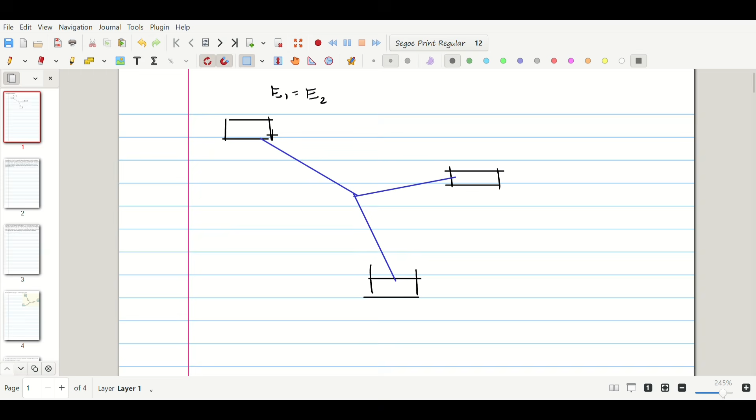It might differ only when there's head loss. But we know that head loss is simply subtracted. So instead of staying the same when there's no head loss, what we do is subtract the head loss from the energy at point 1 before we arrive at point 2.

Or at the energy of our second point. And also, the discharge is still constant all throughout our pipe. So apart from those governing laws, there's one important thing we need to know, and that's the energy at our junction.

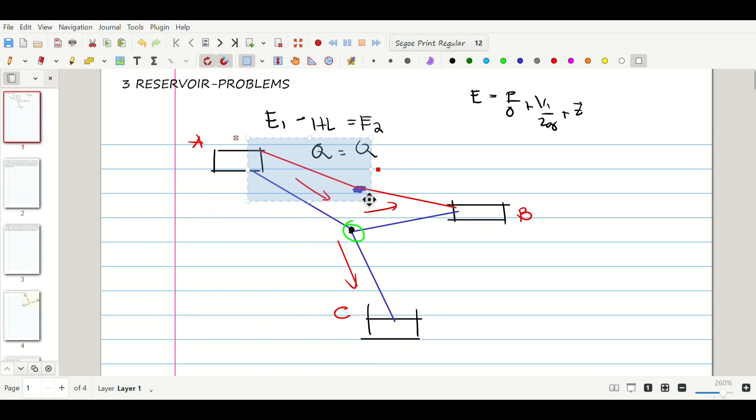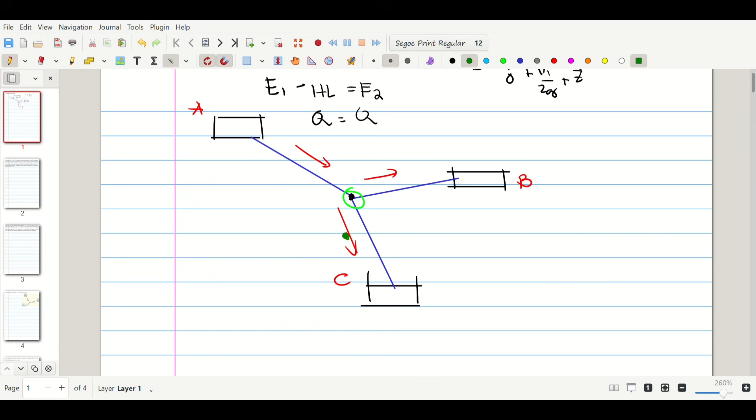So paano naman kung nasa ilalim, kung nasa baba siya. Kung ang ating junction ay nandito sa ilalim, nandyan sa point na to. So alam na natin, ibig sabihin yung energy grade line natin is below kay B and below kay A, yung energy grade line ng junction. Ibig sabihin, the fluid will flow from A to junction and from B to junction, bago sila pupunta kay C. Kung nakalimutan mo, paano natin malalaman yung flow ng fluid? Dahil sa energy, kung nasaan mas mataas yung energy, hindi kasama yung head loss, yung energy in terms of pressure, velocity, at yung ating elevation.

Kaya sila nagiging equal dahil sa head loss. Based on their energy, doon natin malalaman kung paano yung flow ng fluid. Si junction yung magsasabi nun. Kung si junction, yung energy niya ay mas mataas kay B, ulitin natin, mas mataas kay B, ibig sabihin from the junction ang flow natin papunta kay B. At dahil si junction, tawagin natin itong elevation or energy elevation as J, mas mababa naman sa energy ni reservoir, pag ganun naman yung flow. So simply, yung energy ni junction o energy grade line, energy head ng ating junction will tell us kung paano yung magiging flow ng ating liquid.

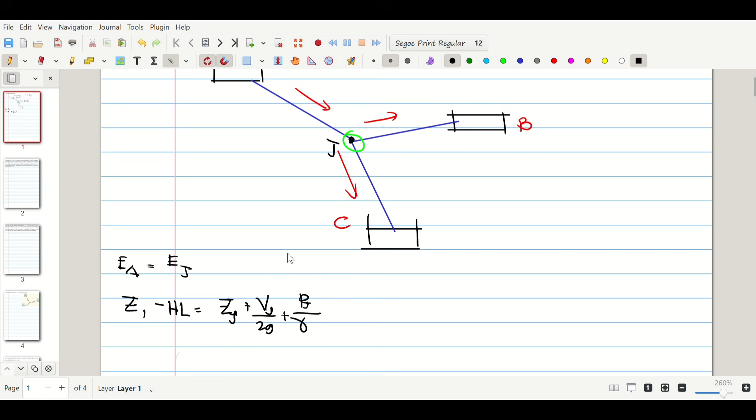So para maging equal yung energy sa reservoir and sa junction, kailangan nating bawasan ng head loss. Let's call this head loss from A to J, yung head loss nitong pipe na to, yung nasa gitna nila. Equal yan sa energy sa point J sa junction, which will consist of the elevation ng junction, elevation head ni junction, velocity head ni junction, and then yung pressure head sa junction. Now, from this equation, most of the time, hindi na natin binibigay dyan yung elevation ni junction o yung pressure head ni junction. At most of the time, hindi na rin yan necessary pang alamin. Depende sa problem, itong mga value na to, hindi na necessary. Bakit? Ano bang kailangan natin? Yung value lang ng energy head sa junction. Wala tayong pakialam kung ano yung pressure dyan, ano yung velocity dyan, ano yung elevation head dyan, kasi ang gusto mo lang malaman is kung ano yung energy sa junction.

So meaning, di ba, kita mo na nangyari? Elevation ng ating first reservoir minus yung head loss, equal na yan sa energy ng ating junction. Okay, equal na. So meaning, let's say nandito yung energy head ng ating junction, yan, this is the energy head. Let's call this J prime ng ating junction. Yung difference in height, in elevation, or in energy from reservoir A and dun sa mismong junction, yun na yung head loss ng ating unang pipe. So kadalasan ang tawag dyan, head loss 1 or head loss dun sa pipe 1.

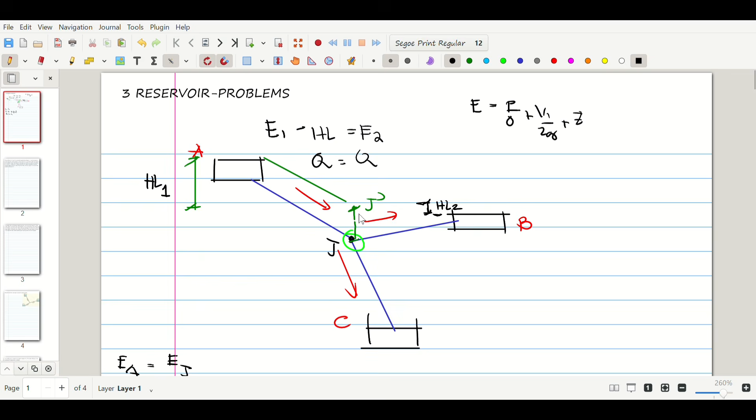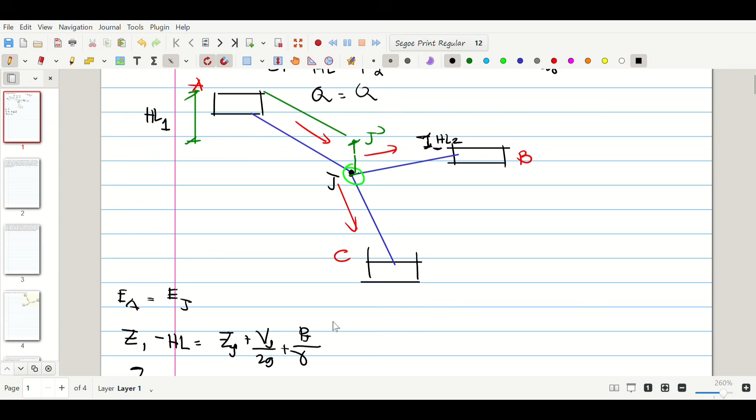Now, one thing to note here about our junction is that there are times when the elevation of the junction is given, and also the pressure is given. So with that, you can already get the energy at the junction. But you might ask, sir, there's still velocity. You may encounter cases where the pressure is given and the elevation head is given, and that becomes the energy.

So what happened to the velocity? What we do here, although it's not really zero, is the velocity is also neglected at the junction. The reason is to simplify our analysis, because if we also consider the velocity at the junction, you will find yourself solving a very complex problem. So in actuality, it's not zero, the velocity at the junction.

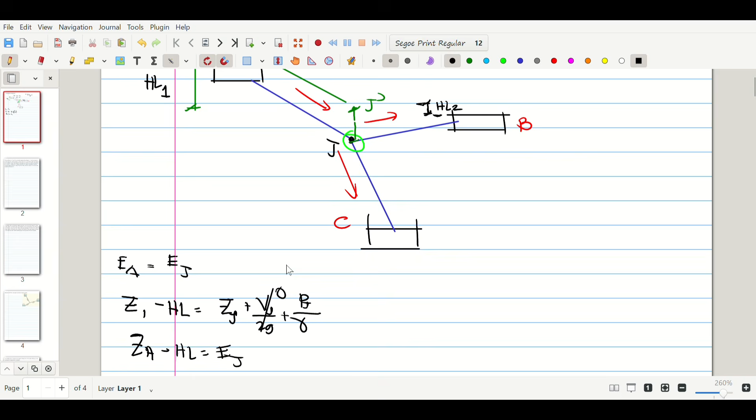Because that's where all the pipes connect, it's not zero. But if we consider it, the solving becomes overly complex. And in real life, neglecting the velocity at the junction is not critical, because compared to the head loss caused by our pipes, it's very small or minimal relatively. So since we're doing approximate analysis, this velocity is not considered. If you ever encounter why the velocity at the junction is suddenly disregarded when getting the energy, the purpose is to simplify the analysis.

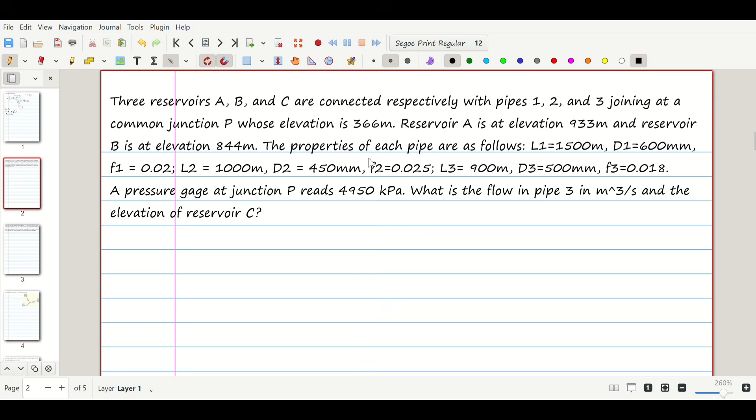So with that, let's solve a problem now. Here we'll see how this works, how it's solved. We have this first problem: we have these three reservoirs, A, B, and C, connected respectively with pipes 1, 2, and 3 at a common junction, with the elevation given.

Reservoir A is at elevation 933 meters and reservoir B is at elevation 844 meters. The properties of each pipe are given. So L sub 1 is the length for pipe 1, D sub 1 is the diameter of the first pipe, and F sub 1 is the friction factor of our first pipe.

Knowing that when the given coefficient is F or friction factor, the formula for head loss that you should use has to be the Darcy-Weisbach formula. Continuing, we also have the length, diameter, and friction factor for the other two pipes, pipe 2 and pipe 3. Also given is the pressure at junction P, which is 4,950 kPa.

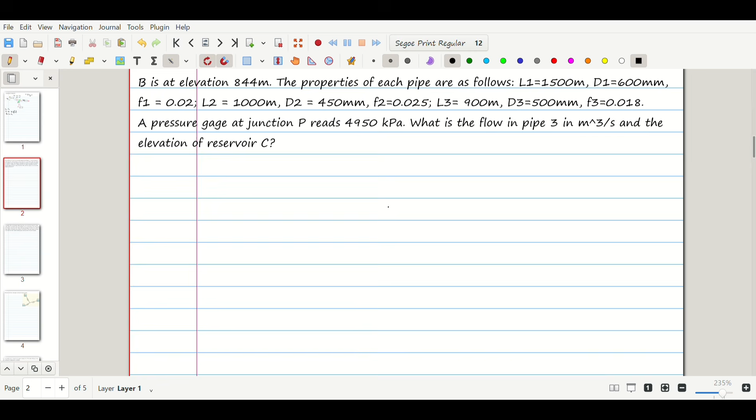So let's write the first reservoir, reservoir A. Its elevation is 933. So that's given, 933. Also, reservoir B is at elevation 844, so somehow it's a bit lower. The elevation is 844.

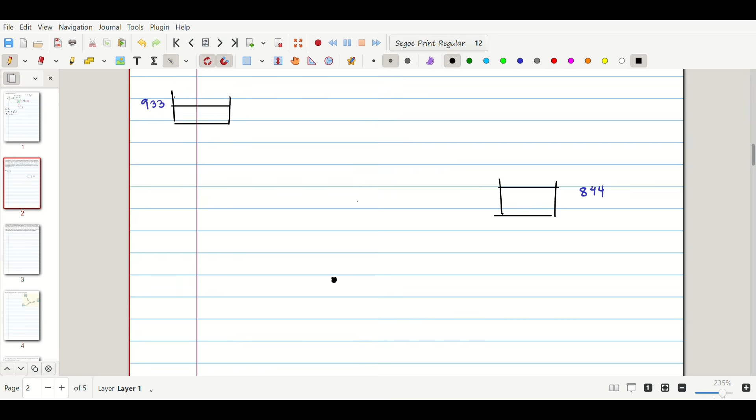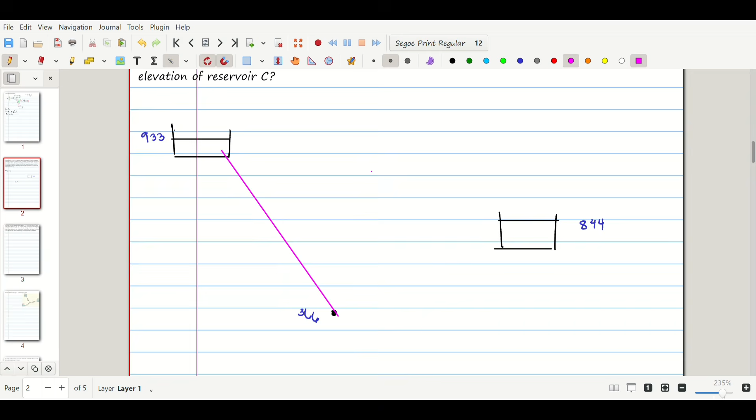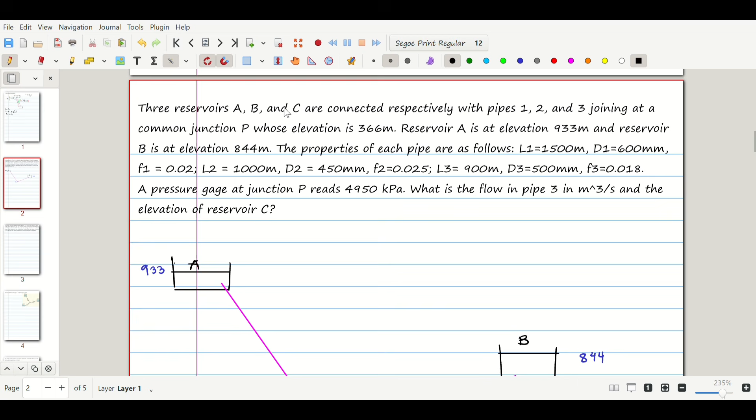So let's place a pipe from reservoir A going to the junction, and then from reservoir B going to the junction. Let's label them: reservoir A, reservoir B.

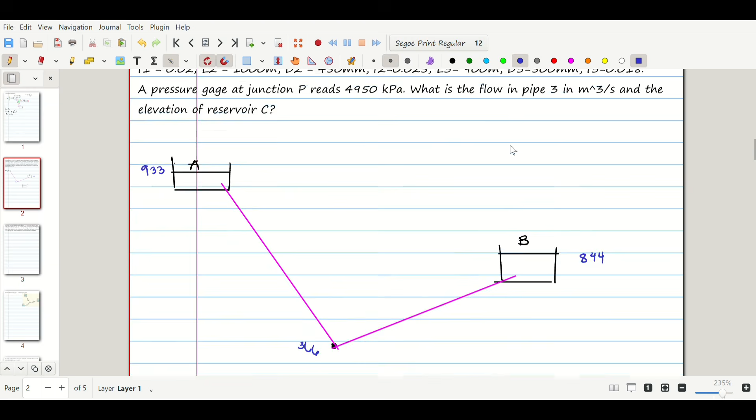And meron pang panghuli which is yung ating pipe number 3 connected to the third or the last reservoir, reservoir C. So lagay natin dyan. Okay? Hindi natin alam ang elevation ng reservoir C kasi yun ang pinapahanap, and yung discharge sa panghuling pipe natin, yung pipe mula sa junction papuntang reservoir C. Okay, so ito na yung initial setup ng ating 3 reservoir.

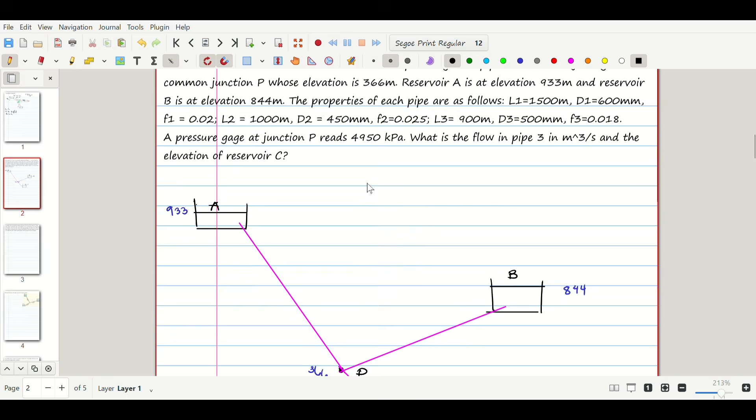Pero ilagay din muna natin na yung pressure sa junction P, okay, let's call this junction P, is 4,950. So may pressure, okay? Ibig sabihin, ang energy at junction P is equal to the pressure head plus the elevation head plus the velocity head. Pero nabanggit ko na kanina, diba?

Ito yung purpose nun, this velocity, sinisiro na natin yan to simplify the analysis. Hindi naman po yan critical because ang pinagko-compare natin nitong velocity head is yung head loss due to the pipes natin, yung mga major head losses natin. And most of the time, this velocity head is maliit lang with respect doon sa major head losses natin, so okay lang na i-zero siya. Okay, pero in actual, hindi talaga zero, we just have no choice but to do this, kasi carry naman sa analysis na hindi siya super magiging malaking error. Complicated po kasi kapag kinonsider pa siya, so meaning, itong dalawa na lang.

So the elevation or the energy head sa point P is the pressure 4,950 over the unit weight, which is 9.81, plus the elevation 366. So from here, makikita na natin kung nasaan yung energy ng ating junction. So this is at 870.5872. From here, you will see this value is lower than the elevation or energy ng ating reservoir A.

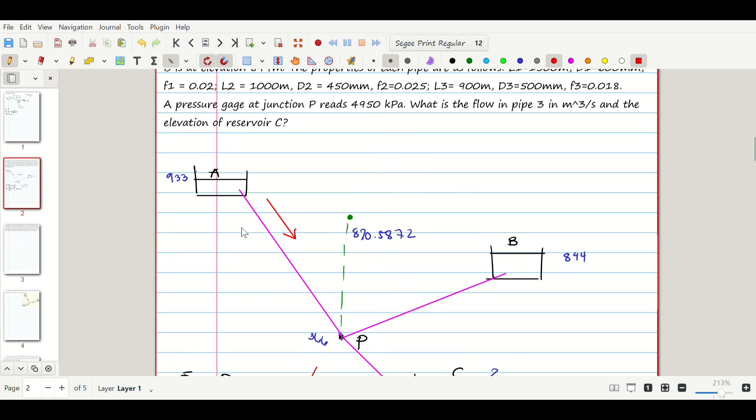So i-check mo na, alam na natin na yung flow ng liquid is from reservoir A, pupunta siya ng junction. The reason? Yung energy, mas mataas ang energy ni A kumpara sa energy ng ating junction. So ganun talaga yung flow. And ito one thing to note, this elevation of the junction has to be lower than the elevation of our highest reservoir. And this junction or the energy head of this junction has to be higher naman doon sa lowest energy or elevation ng ating huling o pinakamababang reservoir.

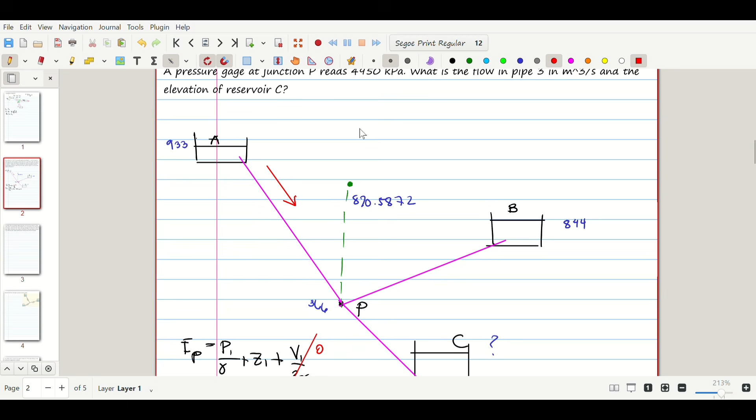So dapat nandito lang siya sa gitna. Bawal siyang lumampas sa elevation ni A, bawal naman siyang bumaba sa elevation ni C. Kasi obvious naman ang reason, diba? Hindi naman pwedeng mas mataas siya kay A kasi sino na magsusupply ng tubig? Diba? Langit? Diba? Hindi naman ganun. So hindi na pwedeng sa ilalim, kasi saan naman nila itatapon yung tubig? So nandito lang.

Now, with this, the flow of the liquid or the water is from A, papuntang junction, and from the junction, obviously, mas mataas na siya kay B, and the same should be true para kay C. Okay? So the elevation ng ating junction or the flow of the water from the junction should be like this.

So kung susumahin, if this is the first pipe or pipe 1, ito naman yung second pipe or pipe 2, and ang huli is the pipe 3. We can say na yung discharge doon sa ating unang pipe has to be equal sa discharge doon sa pipe 2 plus sa pipe 3. Tama? Diba? So mahahati kasi yun. Okay, so parang ito na yung unang equation mo, ito na yung continuity equation in application.

So ina-apply natin siya dito sa 3 reservoir problems. Now, with this, need pa natin ng additional equation. Bakit? Kasi hindi naman natin masasolve yung discharge sa pipe 3 nang ito lang yung alam natin. So we need another data, okay? Dito na papasok yung mga head losses.

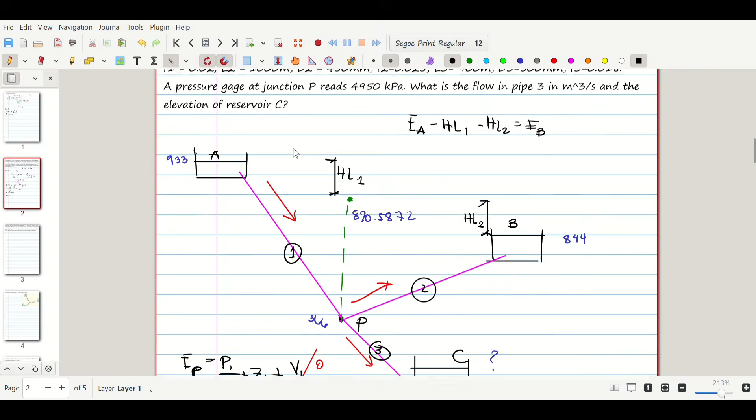So, meaning, the difference in elevation from junction A, elevation Z, from junction A, reservoir A to the junction, that's our head loss 1. The elevation of A minus the elevation of the energy grade line of our junction, that's head loss 1. For head loss 2, that's the energy grade line of our junction minus the elevation of our reservoir. So if you reference it to 0, notice that when we subtract 870 and 844, that's head loss 2.

The difference in energy from junction to reservoir B, that's head loss 2. Let's replace this with J and E. So from these equations, you can see that we can solve for our head losses. Let's solve it since we can.

So the difference in energy from A to J is 933 minus 870.5872. This is equal to 933 minus 870.5872, so this one is 62.4128.

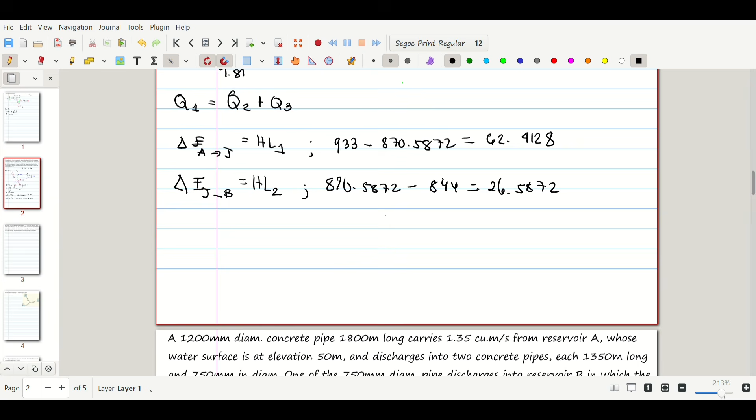So that's our head loss 1. Let's go to head loss 2 since we can get that too. For head loss 2, that is 870.5872 minus 844, so 870.5872 minus 844, this gives us 26.5872. So with these head losses known to us, we now know head loss 1 and head loss 2, or the head loss in pipe 1 and the head loss in pipe 2.

Actually, there's another data we can solve for, and that's Q, the discharge. Let's recall the formula for head loss: Head loss equals 0.0826 times F, L, Q squared, over D raised to 5, using the Darcy-Weisbach equation.

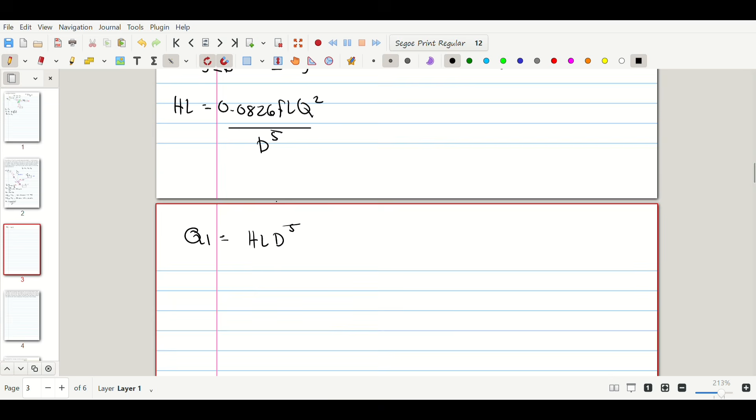So for pipe 1, given its length, diameter, and friction factor, we can solve for Q sub 1, or the discharge in our first pipe. So Q sub 1 equals the square root of HL times D raised to 5, over 0.0826 FL. So what did we do? We moved D there, then divided by 0.0826 FL.

At this point, let's substitute the known variables. The head loss for pipe 1 is known, which is 62.4128. The diameter of the first pipe is 600mm, or 0.6 raised to 5 in meters. Then 0.0826, the friction factor is 0.02, and the length is 1,000. So here we get Q sub 1 equals the square root of 62.4128 times 0.6 raised to 5, over 0.0826 times 0.02 times 1,000.

So this is equal... wait, is it 1,000? No, 1,500. So this gives us 1.3995 cubic meters per second.

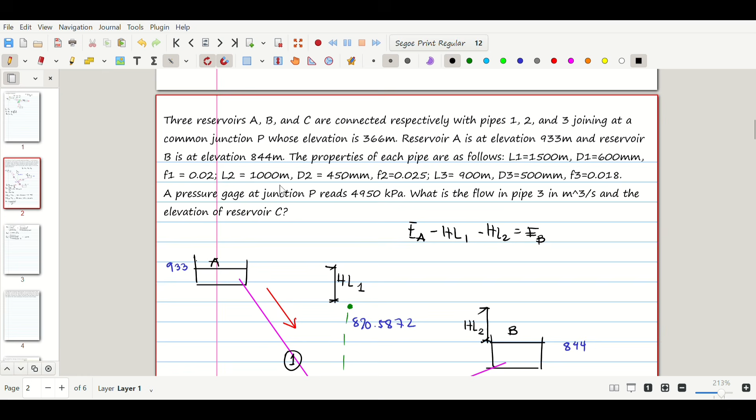So this is equal to... wait, we might be looking at this wrong. 450, 0.025, 26.5872, 0.0826, 870, and 0.45 raised to 5, 0.0826 times 0.025. Actually, the 900 is wrong, it should be 1,000. I knew it. That's confusing. It's 1,000. L sub 3 is the one that's 900, so this should be 1,000. So this is wrong, let's change it.

So this one should be equal to 0.4874 cubic meters per second.

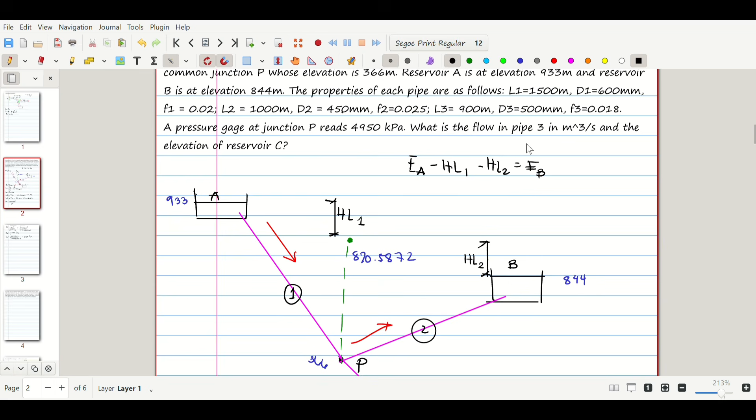From this, we can get the discharge for the final pipe, since we know the discharge in pipe 1 equals the discharge in pipe 2 and pipe 3 combined. So what's being asked finally is the elevation of reservoir C and the discharge in pipe 3. Let's get the discharge first since it's easy. Discharge in pipe 3 equals discharge in pipe 1 minus discharge in pipe 2, Q1 minus Q2. This gives us a value of 0.912 cubic meters per second, and that's our final answer for that.

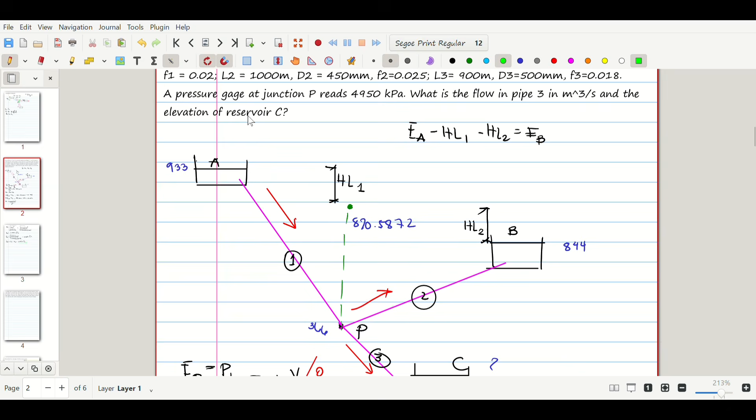Next, what is the elevation of reservoir C? To get the elevation of reservoir C, we know that the difference in elevation or energy from the surface of the reservoir to our energy grade line is the head loss in pipe 3. Same concept: from the junction to reservoir B, the difference in height is the head loss. So it's the same for C. The elevation of the energy head of our junction minus head loss 3 gives us the elevation of reservoir C. So with this, we get the elevation of reservoir C, which is 870.5872.

5872 minus natin yung head loss 3. So ano ba yung head loss 3? Okay, so using the formula...

0.0826 F. May F na tayo, diba? What is the F? For the last pipe, 0.018. So 0.018. How about the length? 900. Q, 0.912 squared over the diameter, which is also given, 500. 0.5 raised to 5.

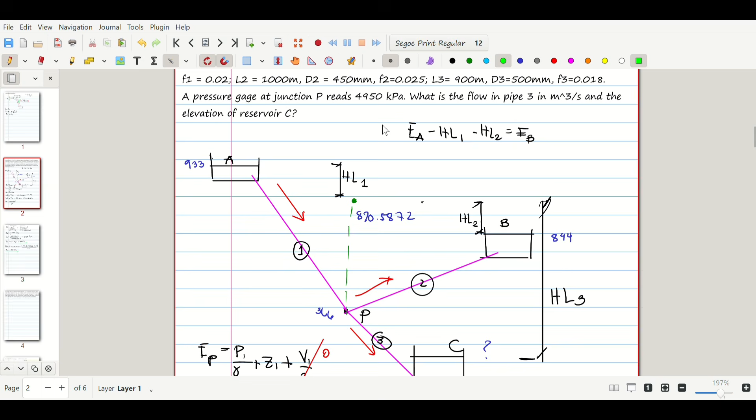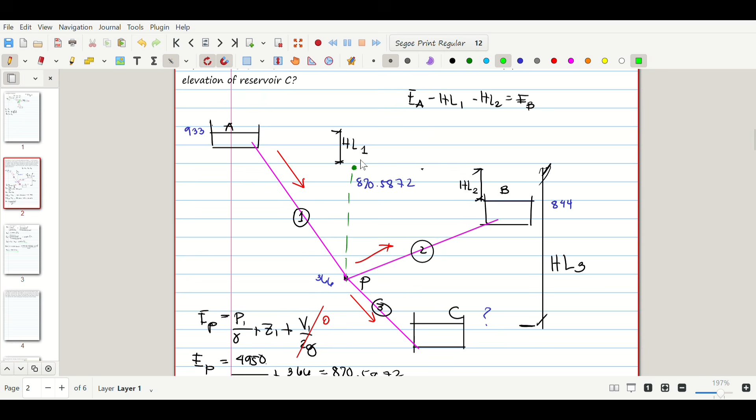Pero pag hindi siya kayang hanapin, doon na papasok yung another way wherein ang gagawin mo naman is to assume. I-assume mo na yung ating energy grade line ng ating junction is mas mataas dun sa ating pangalawang reservoir, and then doon mo i-route lahat ng iyong solution. Okay, so may mabubuo kang mga equations dyan. Diba? So dito sa case natin, anong nabuo mo? Yung ating discharge sa pipe 1 is equal to the discharge sa pipe 2 plus pipe 3.

Pero kung iba naman yung assumption or mali ka ng assumption, kasi anong nangyari, inassume mo na nandoon yung elevation. Pero hindi kasi possible or hindi naman laging 100% tama tayo ng assume unless alam mo na yung sagot. So kung hindi natin alam ang sagot, may tendency na magkakamali tayo ng assume. So ano ang mangyayari kapag mali ka ng assume? Hindi mo masasolve. Okay, ganun na lang kasimple. Hindi siya masasolve. And that is related dun sa ating shift solve.

So which will be matatalakay yata sa kasunod na problem. Okay, so but for this one, kapag alam mo na yung elevation ni junction, gawan mo na ng equation yung ating discharge, gawan mo ng equation yung ating head loss, and tulad ng ginagawa natin sa pipes in series and parallel, hahanapan mo ng relationship yun.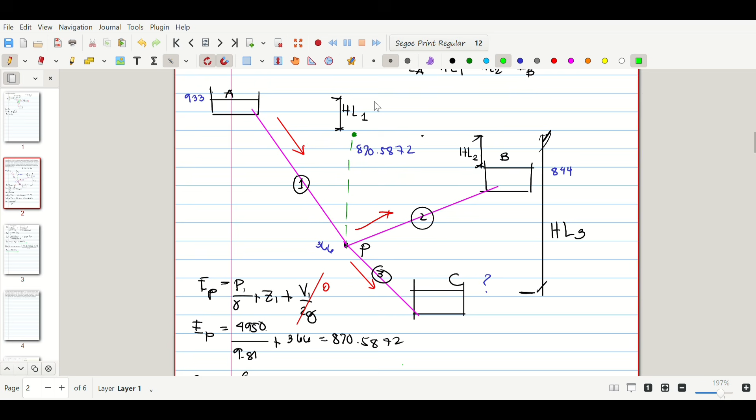Okay, so primarily, anong ginawa natin? Yung mga elevation, diba? So tatandaan mo na yung difference in energy between the reservoir and the junction is simply the head loss ng pipe na dinaanan mo mula sa reservoir papuntang junction. Okay, ganon. And with that, dire-diretso yun.

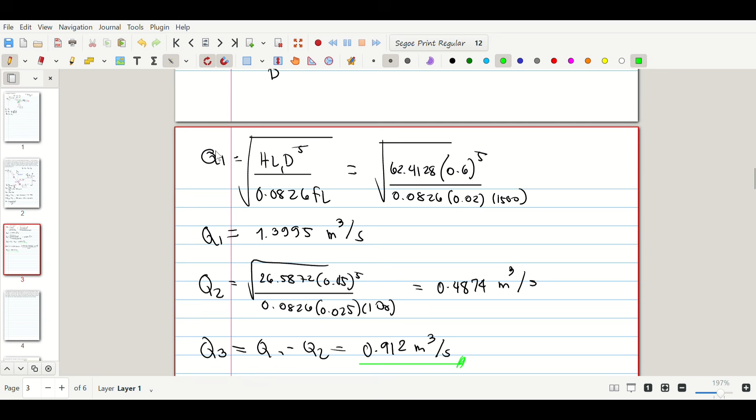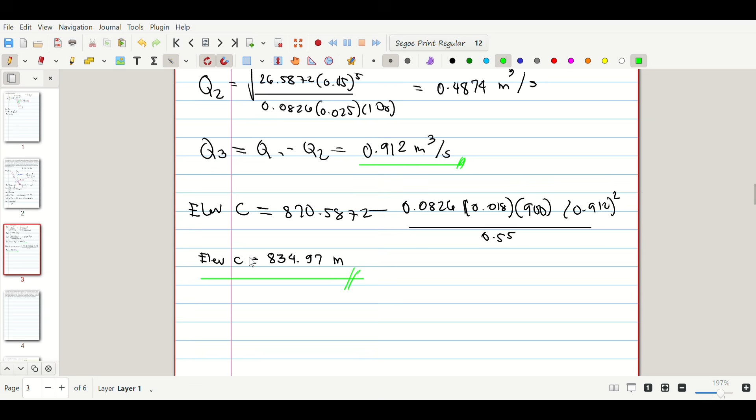So sometimes, ang kailangan mong gawin is yung ating discharge naka in terms of head loss. Okay, so ganun ang gagawin natin. Dahil unknown si head loss, unknown si discharge, yung ating discharge, kinukuha natin in terms of head loss. So possible lang ganun bagay. So diretso yan hanggang makuha mo na yung mga discharge, and then lastly, makukuha mo na yung elevation. Okay, so next problem.

Okay, let's solve naman itong pangalawang problem. So we have here a 1,200 diameter pipe, concrete pipe, 1,800 meters long, and yung discharge sa pipe na to ay 1.35 cubic meter per second mula sa reservoir A.

Ang elevation ng reservoir A is 50 meters, and mula dun sa pipe na yon, magdi-discharge siya papunta sa pangalawa. So mahahati, diba? And both of those pipes are 1,350 meters and both are 750 mm in diameter. Yung isa sa mga pipe ay nagdi-discharge papunta sa reservoir B, wherein the elevation is 44. Ang pinapahanap is the elevation naman ni reservoir C.

Okay, kung nasaan yung isa pang pipe ay nagpa-flow, also assume natin that the friction factor is 0.02 for all pipes. So this one is similar for the pipe for the item number 1. So mas mapafamiliarize tayo kung paano siya nagwo-work, paano natin sinasolve yung ganitong problem.

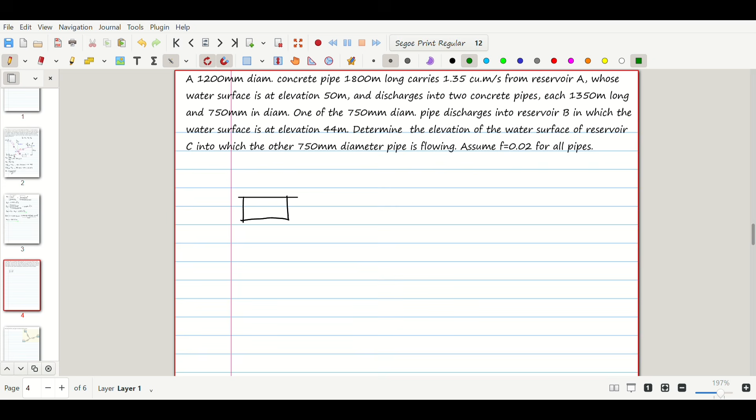So meron tayong reservoir A. So drawing tayo ng reservoir. Okay, so the elevation of this reservoir is 50 meters. From this reservoir, meron tayong pipe. Sabi dyan, yung pipe is 1,800 meters. So ilagay na natin para hindi na maduling ulit. At saka, 1,200 mm in diameter.

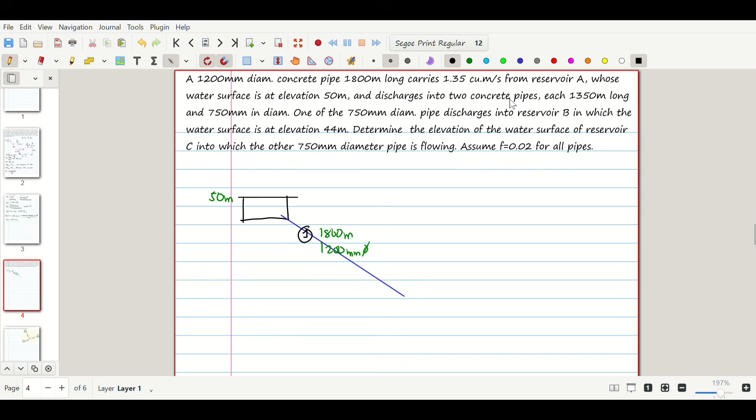Okay, so after a while, itong ating unang pipe, or si pipe 1, let's say this is your pipe 1, siya ay nag-branch out. Okay, sabi naman dito, diba, nag-branch out siya into 2 pipes. Okay, so mag-branch out siya, syempre, doon sa junction. And then, nag-branch out into 2. So yung isa niyang pinuntahan is yung ating reservoir B. So this is reservoir A. Ito naman si reservoir B. The elevation of this reservoir is at 44 meters.

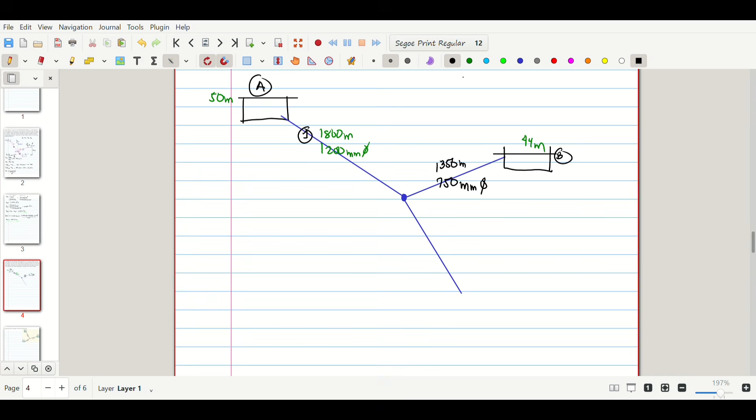The length of the pipe from the junction to the reservoir B is 1,350 meters and the diameter is 750 mm. Same din sa isa pang pipe, same characteristics, same given. So 1,350 meters din yung length ng isa pang pipe.

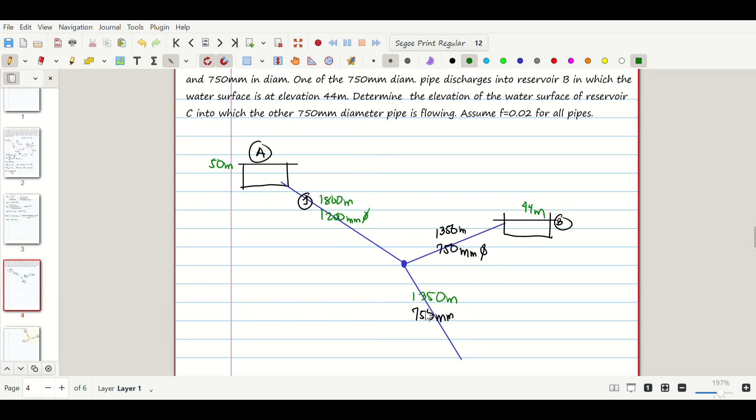So from this, gusto nating mahanap yung elevation ng ating panghuling reservoir or si reservoir C, knowing that the friction factor is the same for all pipes.

So the first step, after illustrating, tulad ng ginawa natin kanina, identify natin yung elevation ni junction. Earlier, given ang elevation ni junction, given din yung pressure, so naalaman agad natin kung ano yung energy ng ating junction. Let's call this junction J na lang. Pero sa case na to, walang given.

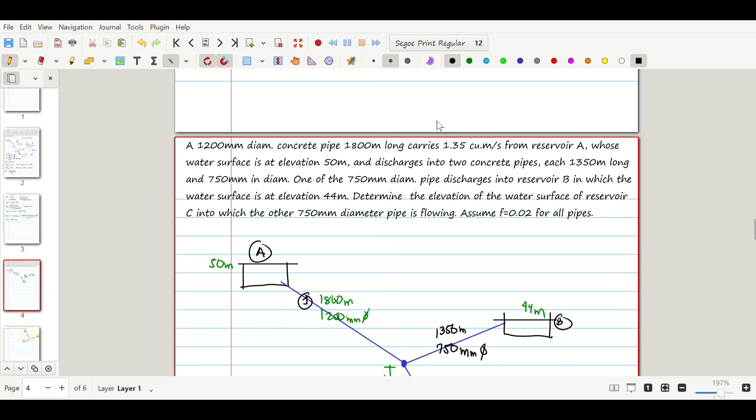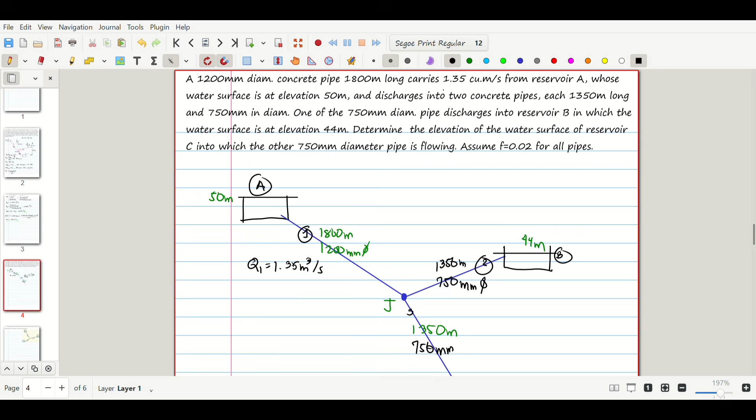Apart from the details of our reservoir, ang extrang binigay lang sa atin is yung discharge sa unang reservoir or doon sa ating unang pipe, which is 1.35 cubic meters per second. Sa pipe 2 and sa pipe 3, walang given. So paano tayo dapat magpatuloy from this point?

Dahil hindi pa natin alam kung ano yung energy head ng ating junction, mag-a-assume tayo. Assume natin na yung energy head natin is mas mataas sa reservoir B. Let's say nandito siya, nandito yung ating J prime, kumbaga nandyan yung energy head ng ating junction.

Kung ganun pala, yung assumption natin dito, yung discharge ng ating pipe 1, siya yung magsusupply ng liquid papuntang pipe 2 and pipe 3. Kasi siya lang yung mas mataas kaysa dun sa junction. So aangat, dito yung ating junction. Yung ating energy from the reservoir, pupunta siya doon sa ating junction. And then from the junction, bababa naman siya papuntang reservoir B, and then papuntang reservoir C.

So with this assumption, sinasabi natin na yung discharge sa pipe 1 is equal to the discharge sa pipe 2 plus the discharge sa pipe 3.

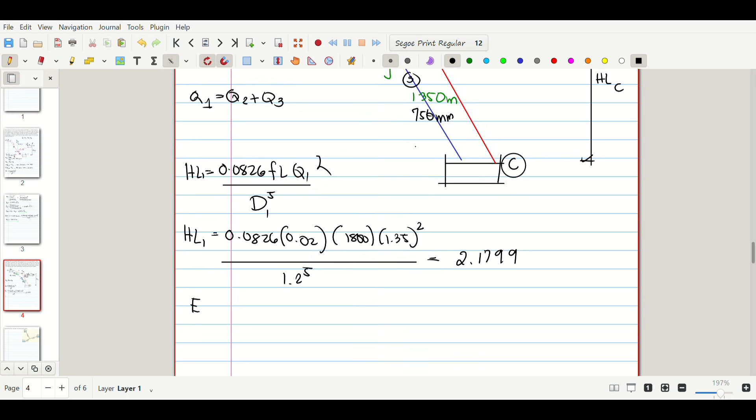And from here, alam mo na agad yung elevation ng ating junction. So the elevation of the energy of our junction, yung elevation ni J prime, that is the elevation of reservoir A, which is 50, minus the head loss, which is 2.1799. So 50 minus 2.1799, this is 47.8221.

Okay, meaning mas mataas si J prime kaysa kay B, at definitely mas mataas yan kaysa kay C. So kung ganun pala, tama yung assumption natin na yung discharge is from pipe 1 - siya ang magsusupply ng tubig papuntang pipe 2 or reservoir B, at papuntang pipe 3 kung nasaan si reservoir C.

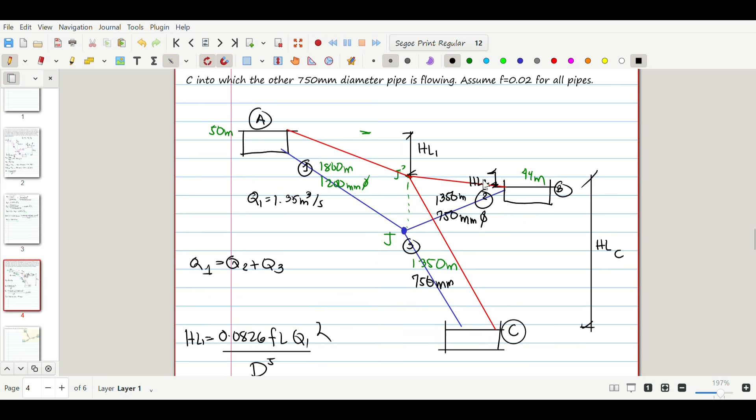So next step, after mong malaman o ma-identify yung location ni J, mapapansin mo, kaya mo na din kunin yung head loss sa pipe 2. Kasi alam natin na this head loss at pipe 2 ay ang energy ng ating junction minus the energy sa reservoir B. Yung energy ng junction, ito na yung nakuha natin, 47. At yung energy sa reservoir, yun na yung elevation niya mismo.

So with this, alam na natin na yung head loss sa pipe 2 is 47.8221 minus 44 - 44 ang elevation ni B. So this is equal to 3.8221. Ito naman ang head loss doon sa ating second pipe.

And if you can solve for the head loss sa ating second pipe, definitely kaya mo na din kunin si discharge, kasi kompleto naman tayo ng data. So solve na natin yung discharge ng ating pangalawang pipe. So the discharge of our second pipe is - okay, pasimplihin muna natin, in terms of head loss.

So head loss 2 is equal to 0.0826 FL Q squared over D raised to 5. Pwede mong i-shift solve, pero mas okay na i-simplify mo na lang wherein i-isolate mo si Q. Ang reason ay para hindi na matagal pa yung paghahanap ng calculator mo, kasi isi-shift solve mo pa. Mas mabilis, at the same time napapractice natin yung algebra natin.

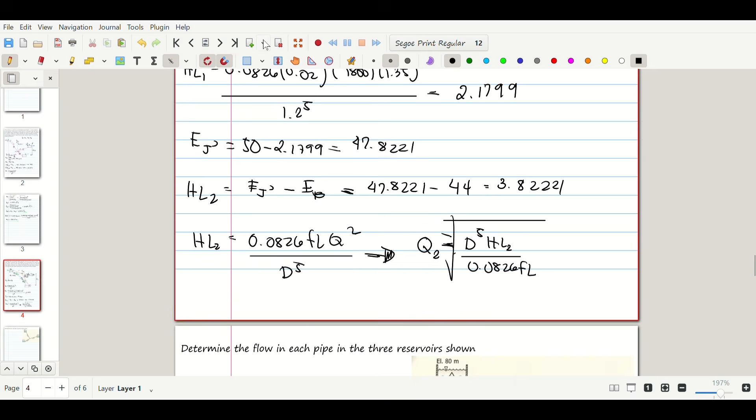So Q sub 2 is equal to the square root of the diameter, which is 750 - so 0.75 raised to 5, head loss is 3.8221, over 0.0826 times 0.02 times the length of 1,350. So from here, masasolve na natin: 0.75 raised to 5 times 3.8221, over 0.0826, 0.02, 1,350.

So we can solve for Q sub 2 as 0.6377 cubic meters per second. So at this point, may Q na tayo, may head loss na tayo - may Q sub 2 and Q sub 1 na tayo.

Ayan ang pinapahanap - water surface elevation of C. At paano ba natin kukunin to? Tingnan mo yung diagram. So mayroon na tayong elevation ng ating junction or energy head ng ating junction. So kapag yan ay binawasan natin ng head loss sa ating pipe C or pipe 3, head loss 3,

makukuha na natin yung surface elevation ng ating reservoir C. So from the junction, bawasan natin ang head loss sa pipe 3, makukuha na natin ang water surface elevation ng ating reservoir C. That is the elevation of the junction minus head loss - ano nga yun?

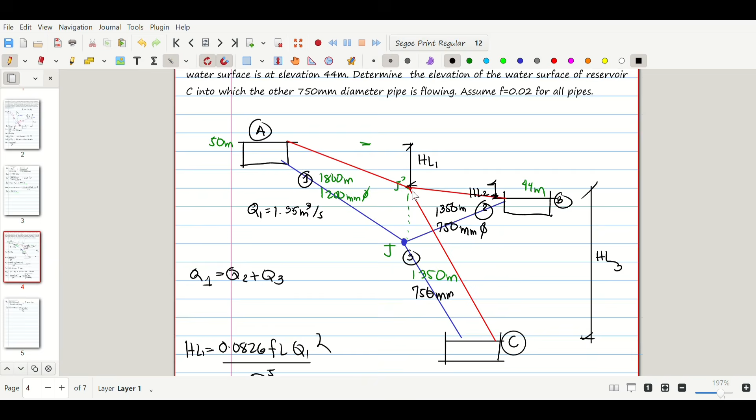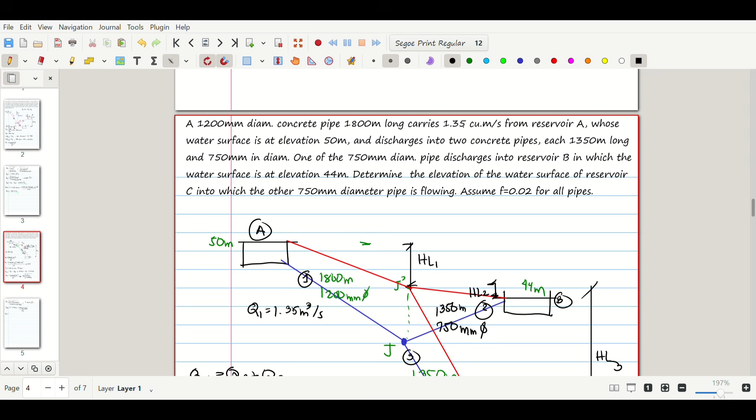So Q sub 3 is equal to Q sub 1, which is - ano ba ang discharge ng ating pipe 1? 1.35, yan given. 1.35 minus discharge ng pipe 2, which is 0.6377. So this should be equal to 1.35 minus...

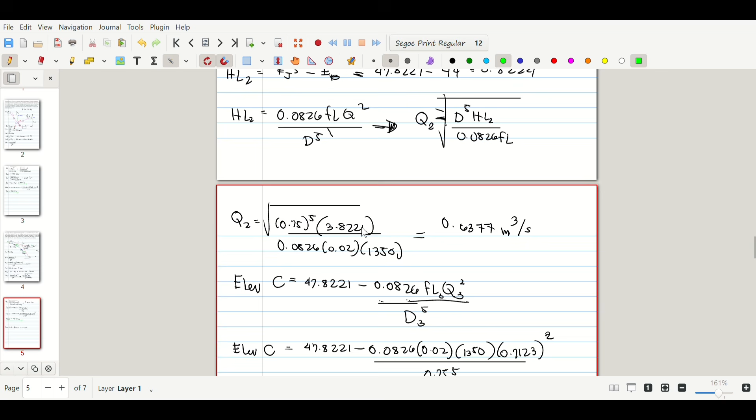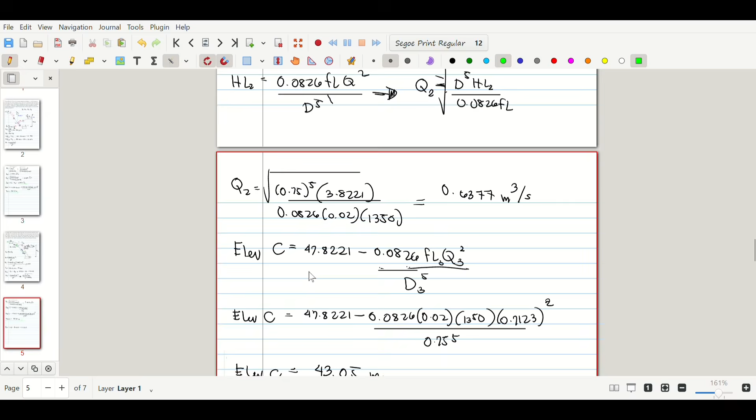The rest is almost repetitive, similar to what we did at first. You need to get the discharge, get the head loss, or get the head loss in terms of discharge, and eventually, once your data is complete, don't forget the relationships you formed before you start - where the flow begins, from Q1 to Q2 to Q3, the same with head losses.

So, it's all interrelated, and everything we've done up to this point, we're just adding information. As you can see, continuity equation is still what we use. The head loss is still what we use. And this concept, the head loss, is the difference in energies between reservoir and junction - Bernoulli's theorem still applies. So don't think this is a completely different aspect or topic because they're connected, and the concept is actually the same, just applied differently.

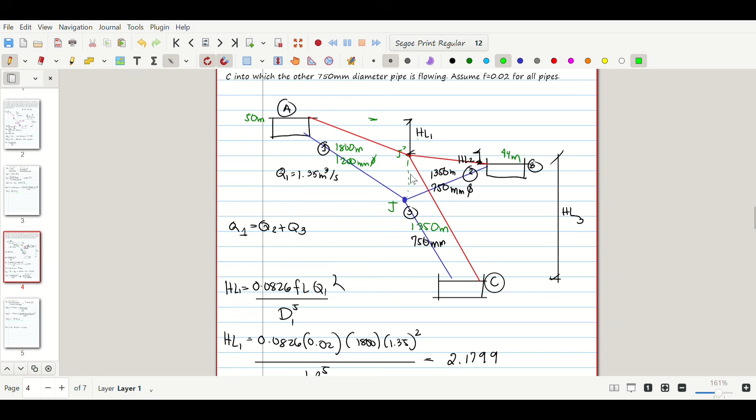So, with this, let's proceed to the last item or last number for this topic.

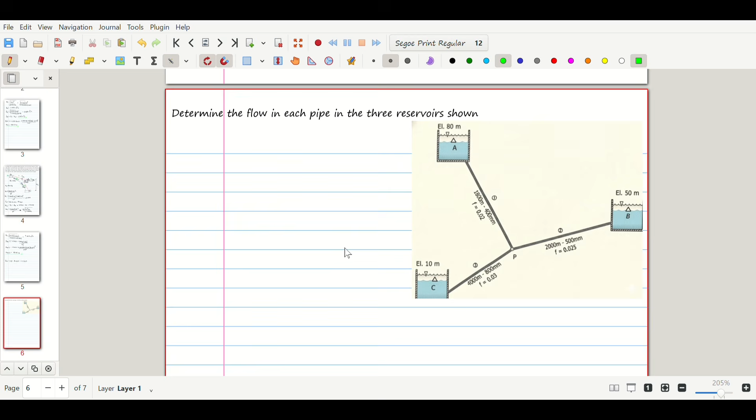Now, for this last problem, we're given the figure, and in this figure, we also have the lengths of the pipes, the diameter, and the friction factors. Also given are the reservoirs, the surface elevation of the three reservoirs. So what this problem wants us to solve is the flow in each of the three pipes.

So for now, we don't have even one discharge. Like I said earlier, your first step, since it's already drawn or illustrated, we don't have to illustrate it further - the next thing you need to find out is where the energy head or elevation of our junction is. If it's not given, what you do next is assume the location or its elevation.

So for this, we have two possible scenarios. We know our junction or energy head could be above reservoir B. The second scenario is it's below reservoir B. For this one, you can assume either. It's just that if our assumption is wrong, our approach becomes longer. But in a case like this, we really have no choice - we have to assume one and hope it's correct so we don't need an extra step. So for now, let's assume it's above, our junction, let's call that P prime.

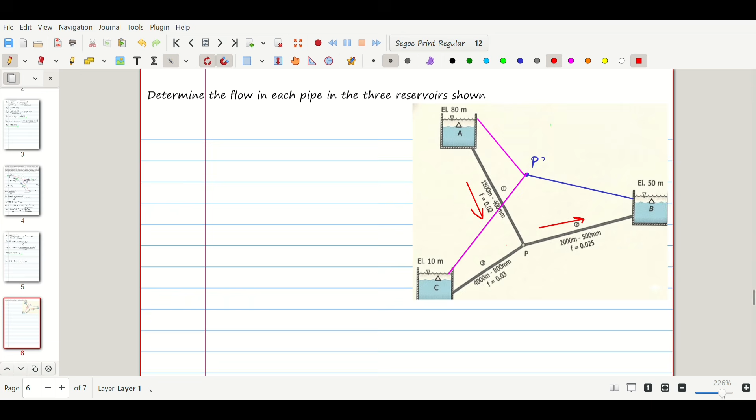So, because the energy at the junction is higher than at reservoir B, it means the flow is from the junction towards reservoir B. And because it's also higher than reservoir C, the flow is from junction to reservoir C. So from this, we can conclude that the discharge at pipe 1 is equal to the discharge at pipe 2 plus the discharge at pipe 3.

Pipe 2, pipe 3. Apart from that, let's also note that since we know the head loss at pipe 1, in this pipe, that is the difference in energy or elevation from the junction to reservoir A.

So, this is our head loss 1. And from the junction going to reservoir B, this is head loss 2. And then from the junction to reservoir C, this is head loss 3.

Now, from this illustration or diagram, you might have noticed that given the reservoir height or elevation of A and B, we can see that head loss 1 plus head loss 2 is equal to the elevation of reservoir A minus reservoir B. Let's write it down so you can see. So 80, the elevation of A, minus 50, equals head loss 1 plus head loss 2.

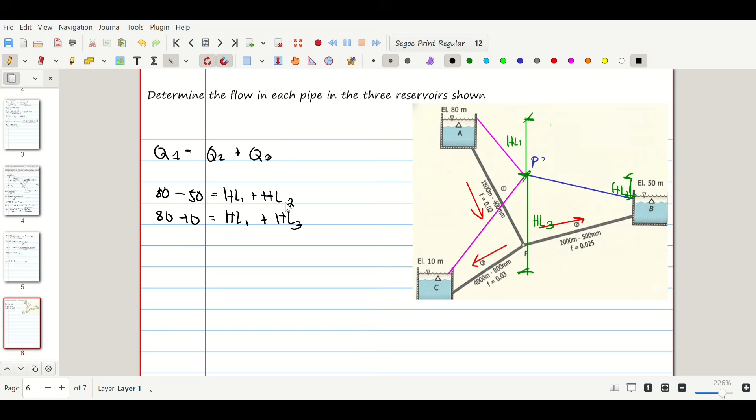So what you have to do next - there are so many unknowns. Like what we always do, either Q or the head loss, we equate it in terms of another variable. What I mean here is HL - we get that in terms of Q. So let's do that.

So HL, or head loss 1, this is 0.0826. For sure you're already familiar with the formula, so let me just write it directly: FLQ squared over D to the 5th. So for HL1, for pipe 1, this is...

0.0826. Our F is 0.02. The length is 1,800. Q sub 1 is unknown - that's what we're solving for. And the diameter is 400, or 0.4 raised to the 5th. So like what we've always done, we take these numbers in terms of one value so it's not too long to type into the calculator. Basically, we simplify it. So this should be equal to 0.0826 times 0.02 times 1,800 over 0.4 raised to the 5th.

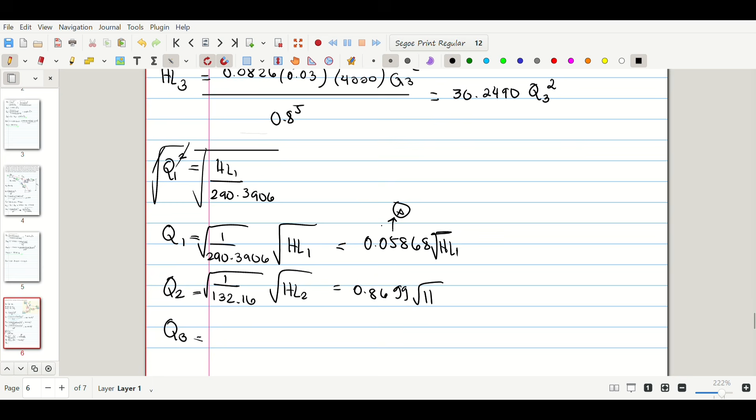So do the same or repeat the process for the second discharge and the third discharge. Idediretso na natin, sana napansin nyo na yung pattern. So it should be 1 over 132.16, square root of HL2. This is square root of 1 over 132.16, equals 0.08699 square root of HL sub 2. At yung 0.086, i-store yan sa B.

Ayan, okay last, Q sub 3. So 1 over square root of 30, square root of 1 over 30.2490, square root of head loss 3. So this one is square root of 1 over 30.2490, equals 0.1818. Square root of HL sub 3.

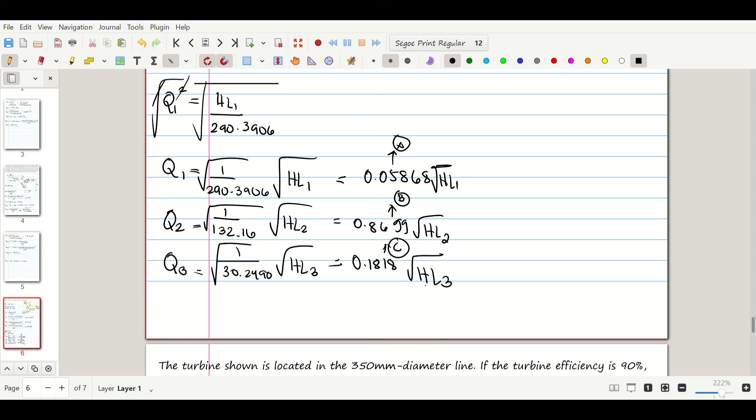So at this point, meron tayong tatlong unknowns pa din, syempre: head loss 1, head loss 2, and head loss 3. Wait lang pala, store mo pala yung 0.1818 sa C. So itong tatlo, ito yung ating gagamitin para ma-express yung mga Q.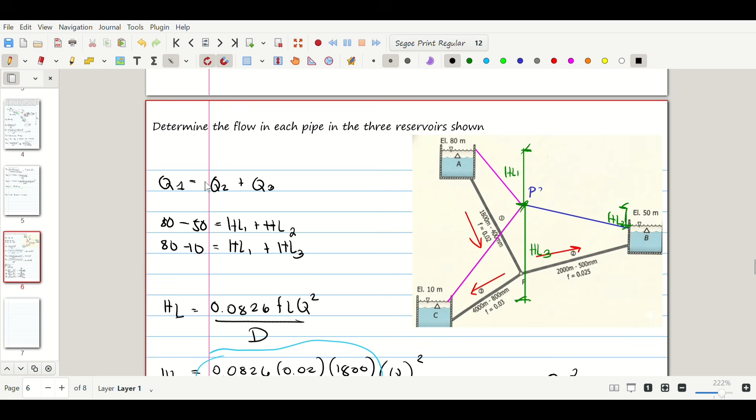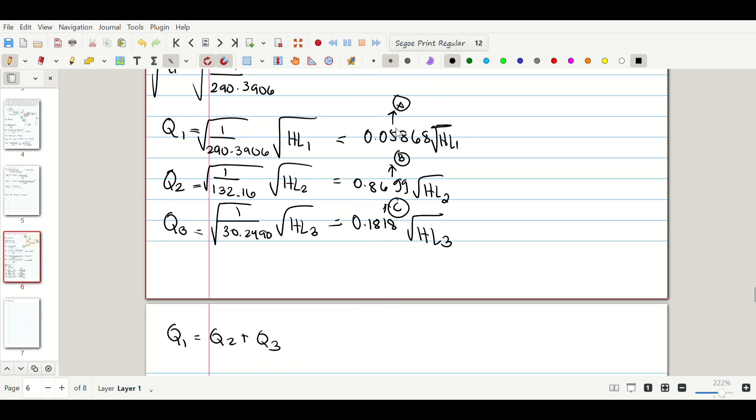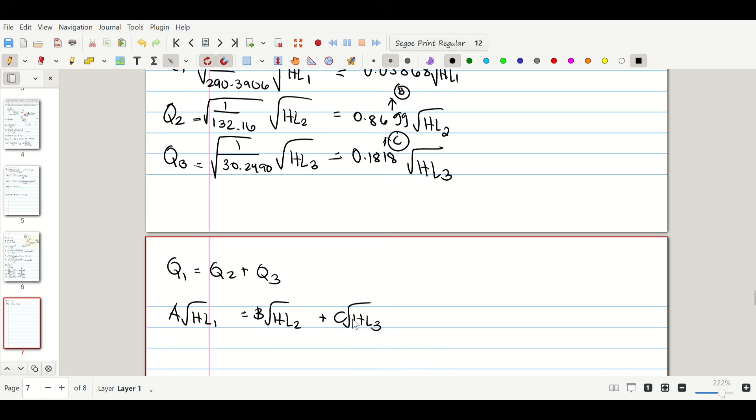Okay, now using the first equation we have extracted, yung Q sub 1 is equal to Q sub 2 plus Q sub 3, atin na yang papaltan ng mga head losses. So we will have Q sub 1 is equal to Q sub 2 plus Q sub 3. Yung Q sub 1 is equal to, tandaan mo ha, yung ating 0.05 naka-store na kay A. So it should be A square root of head loss 1 is equal to B square root of head loss 2 plus C square root of head loss 3. Ngayon, mayroon tayong isang equation but alam mo naman, hindi ito masasolve kasi tatlo yung unknowns.

Pero okay, dito na papasok yung assumption natin. Diba, may relationship yung head loss 1, head loss 2, at head loss 3. So dito, ikaw na yung pipili saan mo i-express yung variables natin. Head loss 1 ba, head loss 2, o head loss 3? So pipili ka kung saan pinakamadali, at yung tinutukoy ko dito ay si head loss 1. Bakit? Kasi yung head loss 2 and head loss 3, based on these equations, diba, pareho na natin sila nagawa ng relationship with head loss 1.

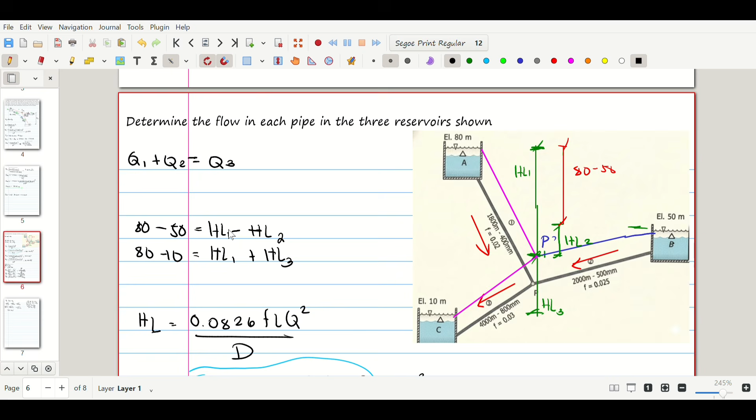However, the last one, the 80 minus 10 equation, that one doesn't change - it's still the same: 80 minus 10 equals head loss 1 plus head loss 3. So equation 1 and equation 2 are the ones that changed.

Let's adjust this in the final form. This should be Q1 plus Q2 equals Q3. So this part also needs to change, becoming plus equal. And lastly, this also changes to plus equals. Now, for head loss 3 here.

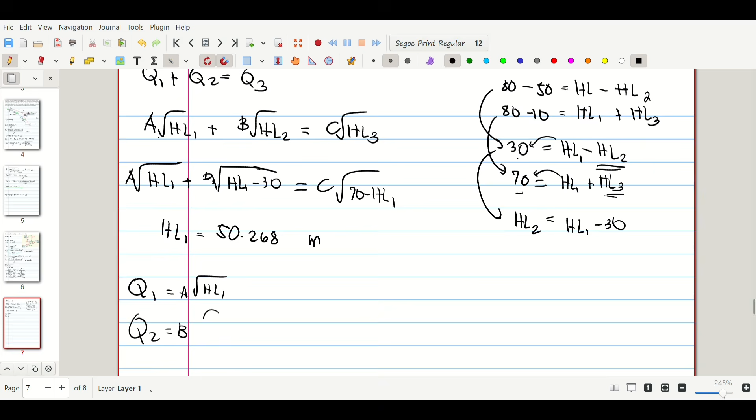Once you have HL1, you'll notice you can now get the flow in each pipe, because we know that Q sub 1 equals A times the square root of HL1.

Q sub 2 equals B times the square root of HL2, where HL2 is replaced by HL1 minus 30. And lastly, similarly, C times the square root of 70 minus HL sub 1.

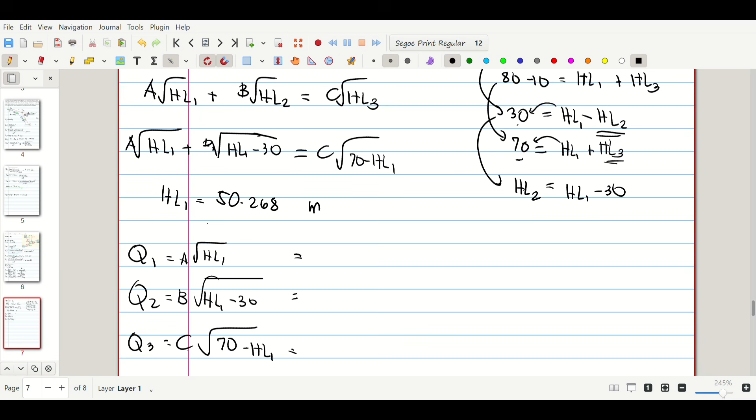Now for the second one, Q sub 2: B times square root of head loss, which is HL1 minus 30, giving 0.3916 cubic meters per second.

And lastly, C times square root of 70 minus HL sub 1 - so the discharge in pipe 3 is 0.8077 cubic meters per second. So you can get the discharge for all pipes together.

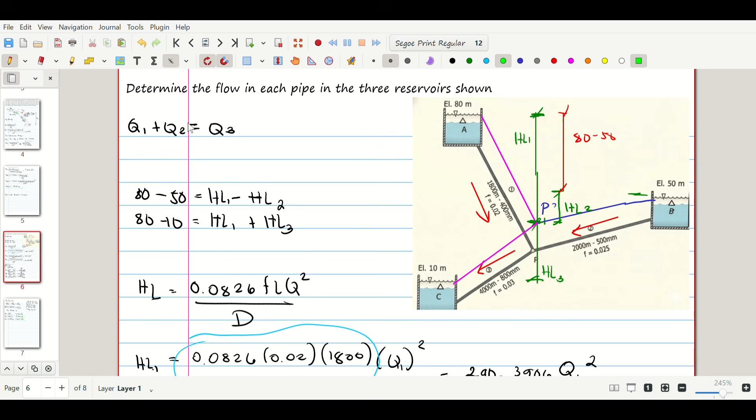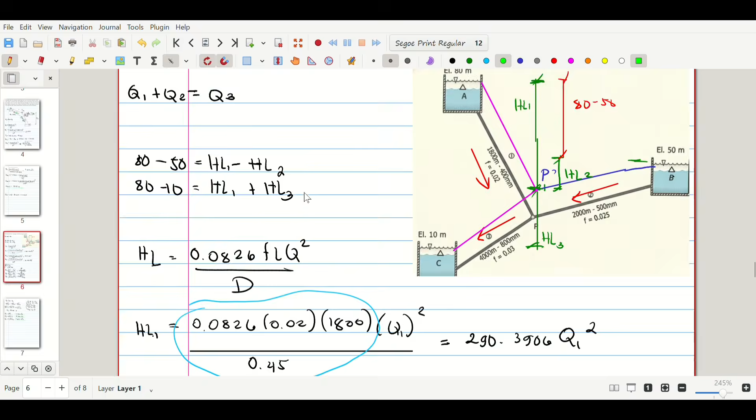Repeat this process - once you get the head loss, express its value in terms of the discharge Q. From there, find the relationships between your discharges and head losses, and you'll eventually solve the unknown asked in the problem.